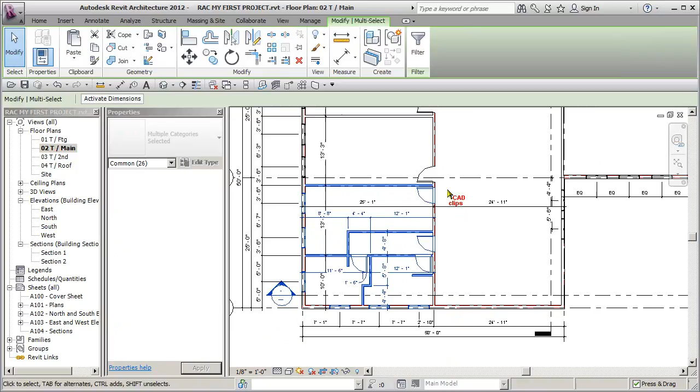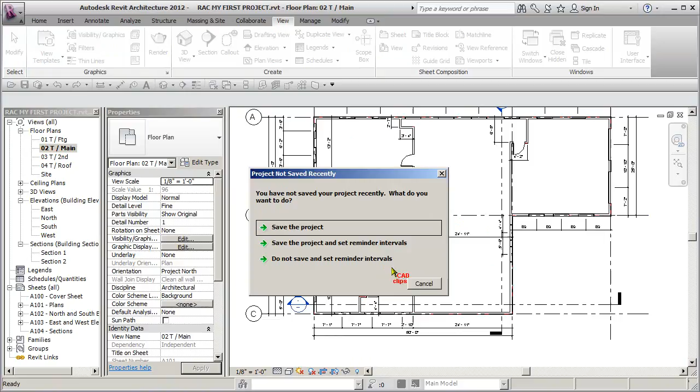You can select all those objects. If you go to your second floor and they project up into here, you'll see them. If you go back to your main floor, they're still selected. So you can select objects in more than one view, other than the default 3D view. If you go to your default 3D view, it will cancel your selection. I'm just going to cancel this request to save.

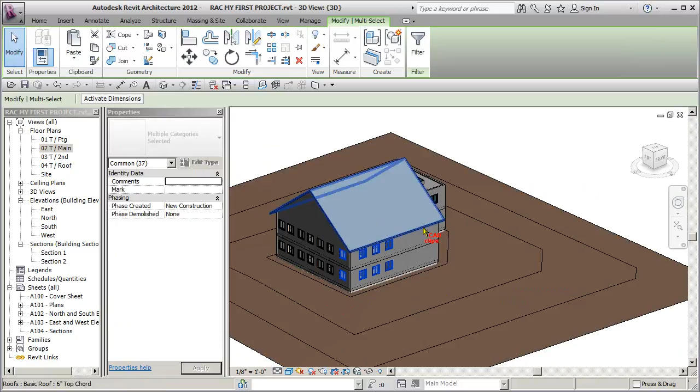Same thing with selecting: window box, crossing box. Be careful with your press and drag, because if you pick to press and move something, it'll actually try to move the object. So sometimes you have to turn this off when you're doing window box and crossing box. So adding and removing, window.

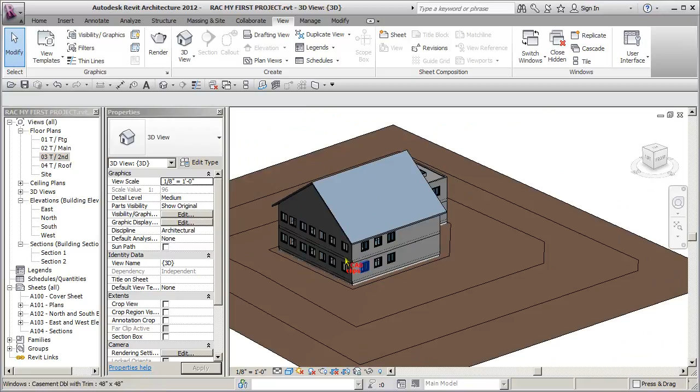If I grab all those objects and go to my second floor, it does leave them selected. So if you grab them in the default 3D view and go to a plan view or something, it'll keep them selected. But when you go back to the 3D view, it actually deselects them. It's the only view where it won't keep your selection set. But for the most part, you can go from view to view and select different objects.

So that's the add and remove standard selecting. Then we have our tab option. If you are zoomed out and in a busy area, you can hover over here and go tab, tab, tab, tab, and it'll cycle through all the objects in the area. Look at your status bar down inside here: first it says window casement double, then it says basic wall, then chain of walls, then grid line 1, and then it's back to the window again.

So if I zoom out and go tab, tab, notice it grabs all those walls. If you hover near a wall and use your tab key, it'll find that chain of walls, and then you click. Watch: hover, tab to grab the chain, click. Same thing somewhere inside of here: hover over, tab, click.

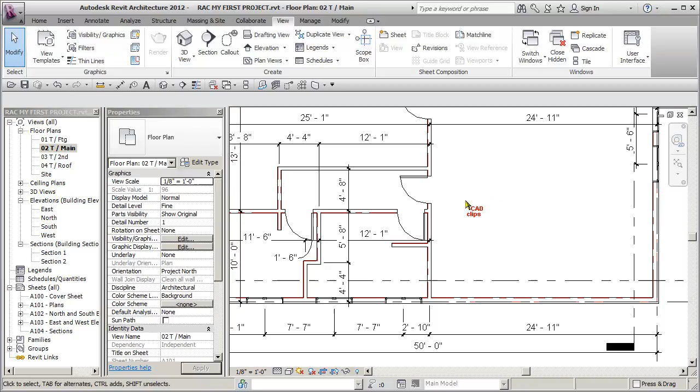It'll grab those objects, and then from there I can change the properties. Okay, I haven't talked about what you do with them once you get them; I'm just talking really about selecting the objects. If you click on this dimension, you can see the properties. There's not much there. If you go Edit Type, you'll see there's a lot of information.

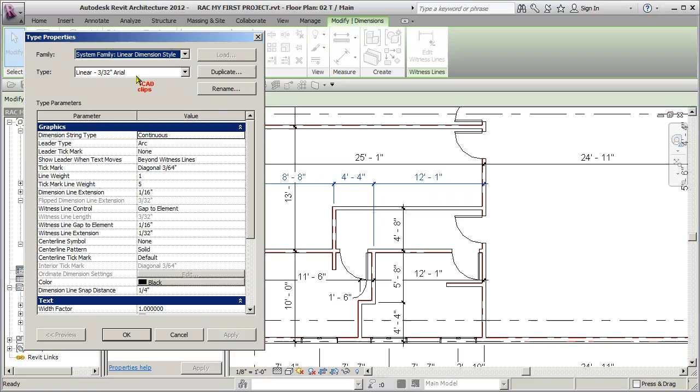If you want to change that dimension type, you should probably duplicate, rename it, give it a different name, and then change your properties. Otherwise, maybe your intention is to change all of them. If you don't rename it and change your properties after you've selected it, then all of those instances that are of this type will update. So that's a powerful thing. You want it that way, so that if I change this, it changes all the dimensions in the project.

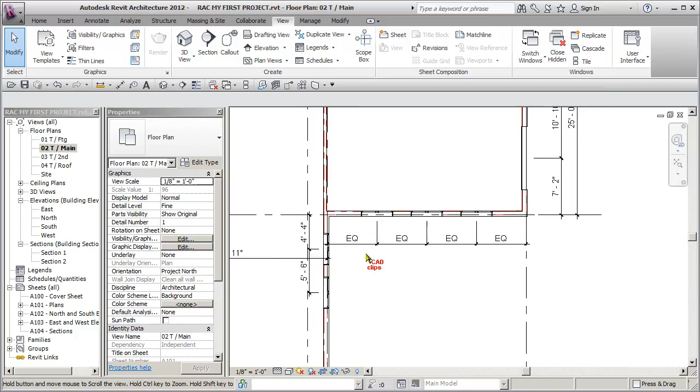So anytime you need to select anything: tab, tab, tab, because it gets busy, and you can't always grab the object you want. You can use your tab key along with your selecting and your shift, because you can shift tab as well. So watch. I'm going to grab all this stuff. Now I'm going to hover over this wall, and just go tab and then shift click. That'll remove it.

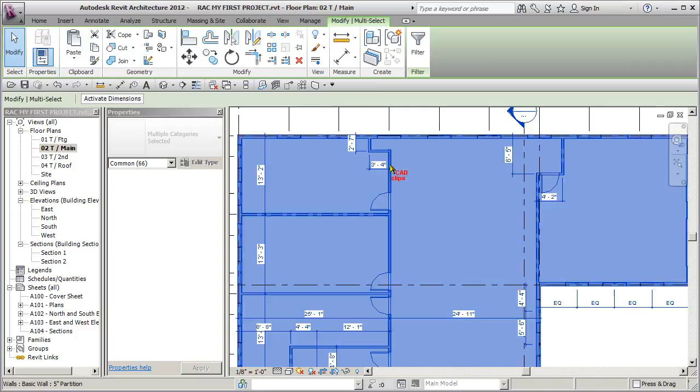I'm going to do that again. Grab a bunch of objects. I want to remove that chain of walls. My hands aren't on anything right now; they were just selected. I just did a big window box and did my selection. Now I'm going to wheel in, hover over here, hit tab first, then hold my shift key in and make the selection. Now those have been deselected, and then I can move them, copy and paste them, mirror, rotate, or do whatever I want with them.

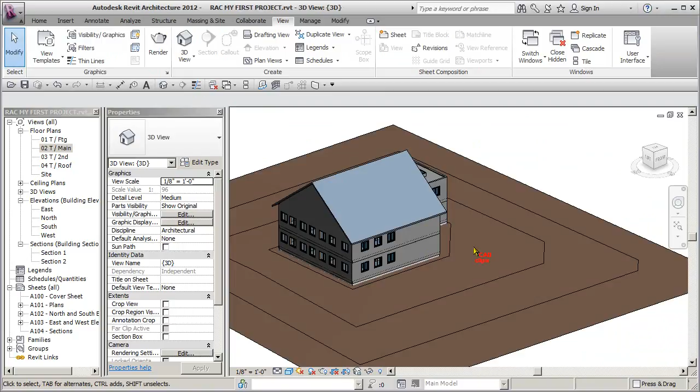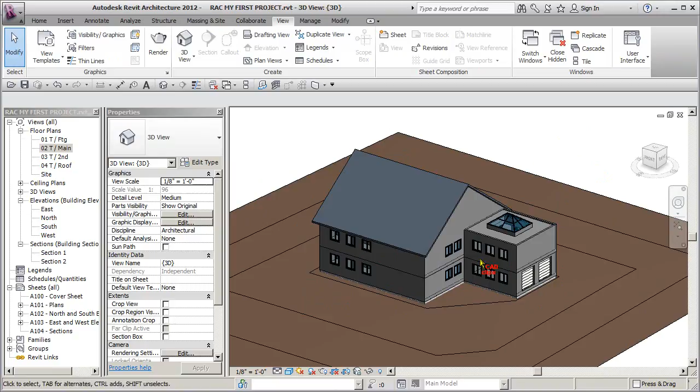So in this case, you can use tab to remove stuff. Watch, I'll do it again here. Do a big window box. I'm going to hover over this lower wall, go tab, and then holding my shift key in, click. As opposed to just creating a selection set, which is hover, tab, select. That would select them. Here I'm using hover, tab, shift, select.

Watch, we'll do another one here. Hover, tab, select. Now my hands are off the mouse and keyboard; it's been selected. Now I want to add these guys in. So I'm going to hover, tab, then hold my control button in and click. I had to hold control because if I didn't, it would have deselected the first selection. That rule still applies: if you don't use the control button and you make a new selection, it will cancel the first selection.

I'll do that one more time. Hover, tab, click, selects that. Now, if I just go up here and go tab, click, it'll deselect the first one. So that's why you have to hover, tab, and then control on the keyboard, click.

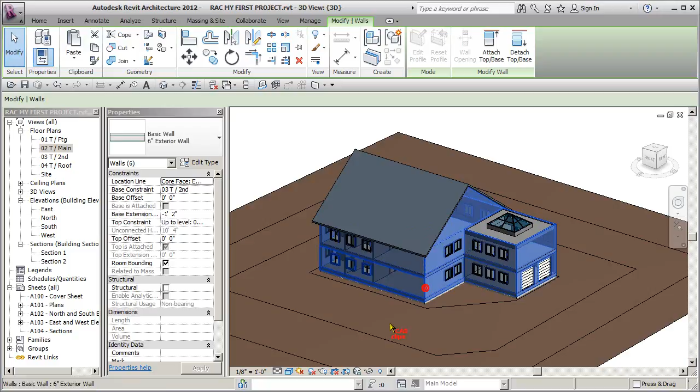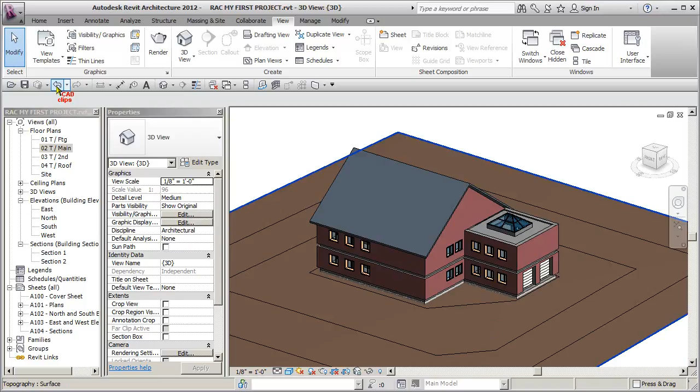And then after that, there are all these walls, and I can either change the properties of that wall, or change them to a different type of wall. If I say, you guys are all brick walls, now I've got a brick building. So it's really easy to do all kinds of changes once you learn how to select stuff. I'm just going to undo that one.

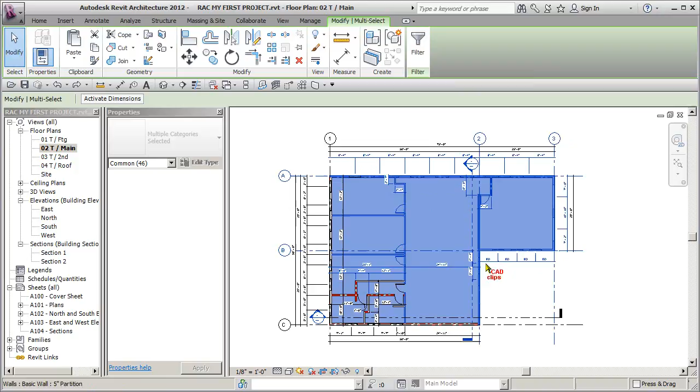So those are really the basics of selecting, and then we have our filter. After you've done all your selecting, be it a window, a crossing, or hover, tab, select, shift to remove, control to add, once you have the objects selected, if you have multiple categories, you'll see this Filter show up. It used to be down here and they've moved it up here. So now you click Filter and it says there's 10 dimensions, 6 doors, 1 floor, 4 grids, 1 view, which is a viewport, 4 walls, 12 windows.

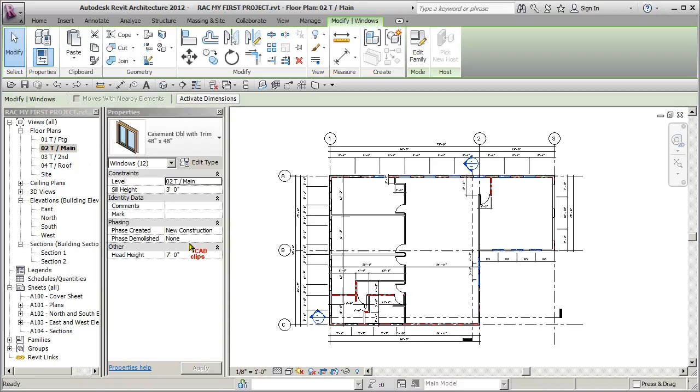I can go in here now and say Check None, then just click on the windows and say OK, and it'll just grab the windows. Then I can take all these windows and change them to a different size, and there you go. Really quick. Go to a 3D view, and there's my windows all changed. So you can do that in any view.

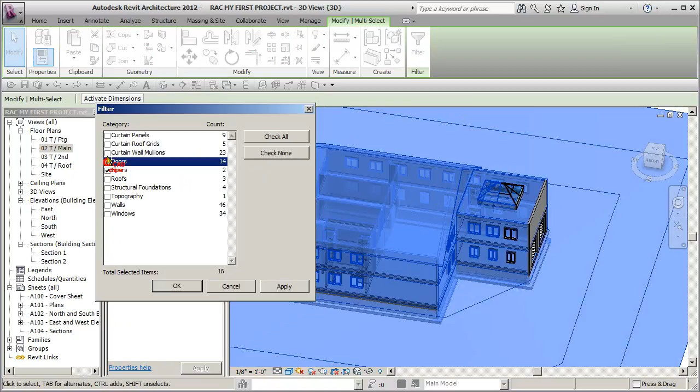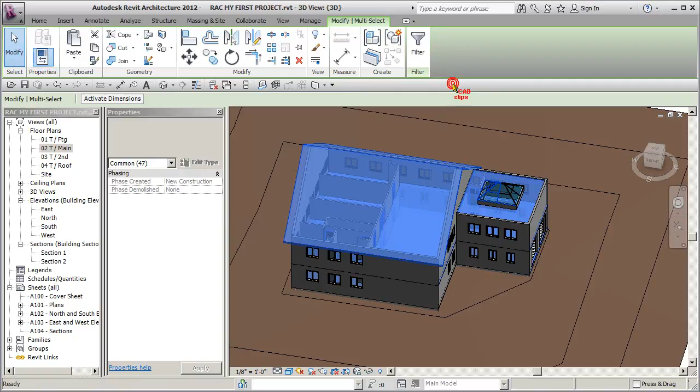You can be in a 3D view or 2D view, pick, go into the filter, check none, and pick whichever ones you want. Then hit OK, and from there you can move, copy, rotate, turn off the category, do all kinds of stuff. This is all available once you've selected, and you can use the filter option to help you filter that selection.